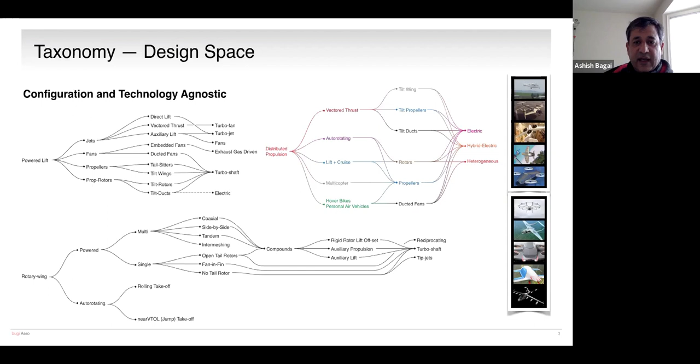However, these are no longer the technologies that constrain the design space, and distributed, aggregate, dissimilar, asymmetric configurations are now also possible with increasing likelihood of success, especially as those that are enabled at a practical level by electric drivetrains. Mind you, the GoFly competition is agnostic to configuration and technical approach, with the exception that it seeks to enable the remarkable, as stipulated in the objectives of the competition. But as you've seen, there have been a number of new approaches that have been developed in recent years.

What's important here is that the learnings from different domains can provide insight and solutions to technical challenges for other applications. Historically, the trends in VTOL technologies have been driven primarily by the desire to hover efficiently and fly fast. Doing them both together, of course, has been a big challenge. There have been some successes in hybrid or compound systems, the tilt rotor and the lift offset compound being two examples of aircraft capable of extended hover while flying fast.

Morphologically, helicopters look the way they do for a reason. But this is no longer the case in terms of power and propulsion integration. And today, numerous new concepts have been developed and proposed to enable vertical flight and personal air vehicles, all being enabled by the ubiquitous availability of materials, new systems, new design methods, affordable components and skills, and all of these woven together by the fabric of modern communications and information sharing. This is a particularly exciting time in the development of vertical flight.

Indeed, recent trends in man-rated VTOL aircraft, typically involving some level of electric, hybrid, or mixed propulsion, have shown exponential increases in the number of aircraft projects during the past decade. In fact, by current count, well over 130 concepts are at some stage of development, and this discounts unmanned and other smaller UAS systems.

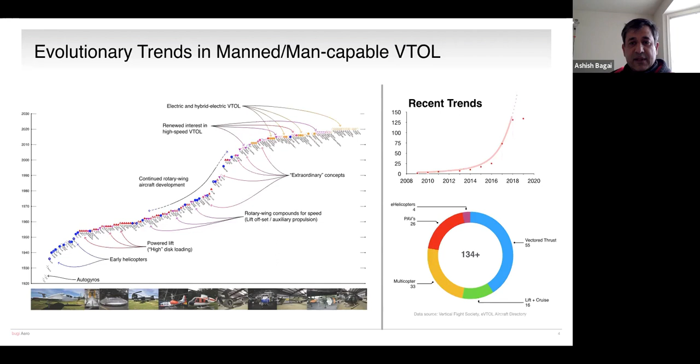So with this in mind, let's take a quick look at the effort and what needs to be accomplished. In February, the competition is looking for solid proof of viability, with phase 2 awards being announced in March. Thereafter, it's a mad dash to integration, testing, verification, and preparation for flight test, executing pre-competitive flight test, addressing requirements, gathering data in support of flight readiness, and then finally followed by a competitive fly-off in October.

Accomplishing all of this within 3/4 of a year is going to require some carefully orchestrated efforts to address everything from personnel and inventory management, fabrication, subsystem integration and testing, air vehicle integration and testing, through dynamic simulation, modeling, ground testing, and finally flight. These are activities that are perhaps well underway, but it would help you to track your progress and identify your key milestones and the interplay between subsystems.

One of the most important opportunities for you is to ensure you communicate regularly and clearly between team members. Don't just schedule formal periodic meetings; maintain clear and open channels of communication, and push information to each other. Make sure the people who need to know of changes are informed directly and not through indirect means.

So I was pointing out that we need to recognize that while time is of essence, you will save more time and effort by pausing to measure twice before cutting in executing your program. Some rework and respins are inevitable, but if you can devise clever trial or proof of concept approaches to improve your execution of difficult technical areas, it is highly recommended that you do so.

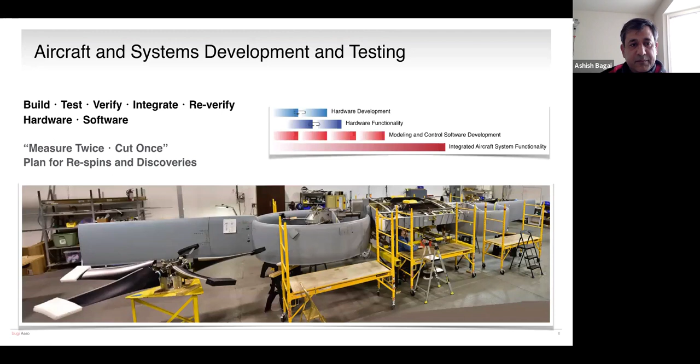In preparing for flight tests, there are a few things in life that will keep you up at night, like anticipating the arrival of a baby or preparing to launch your aircraft and replaying everything you've ever done and second-guessing yourself before first flight. My suggestion here is to prepare carefully and deliberately. When our first baby was due, we attended classes on what to expect. We went to every class except the one on delivery by cesarean section because it wasn't relevant to us. Well, guess what happened?

You will have a lot of items to keep track of and to keep straight. Even for seasoned developers, first flight and flight test in general is an intense process. Plan your activities carefully, know your players, understand their requirements and how you will address them, plan for contingencies, big and small. Flight readiness and safety of flight board reviews often look for quantitative data to assess preparations for flight. Start capturing data early on, including during your bench testing. And subsystem verification testing can also provide a lot of significant and important information.

Often, information gathered during early testing periods can help substantiate and corroborate data required for flight. And you can adopt systems and methods to minimize overhead burden so that you're not having to document everything formally, but can do it in a streamlined manner.

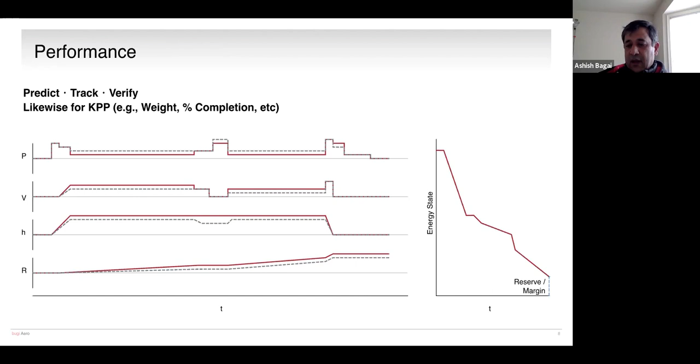In the same vein, it would behoove you to distill your subsystems into systematic groups to help identify key elements of the technical program that must be addressed. These include sharing information across subsystem groups, supporting the development of system interfaces, looking for potential failure points and their impact, all of which will support your ultimate success.

It is very important to retain some margin in critical systems, be it performance margin, redundancy, or alternative backups. Should the need ever arise to pull on one of them, you'll have a successful fly-off. Anticipating is important here. Try to position yourself into an operational scenario and look back to see what you may have wanted to adjust while you're executing.

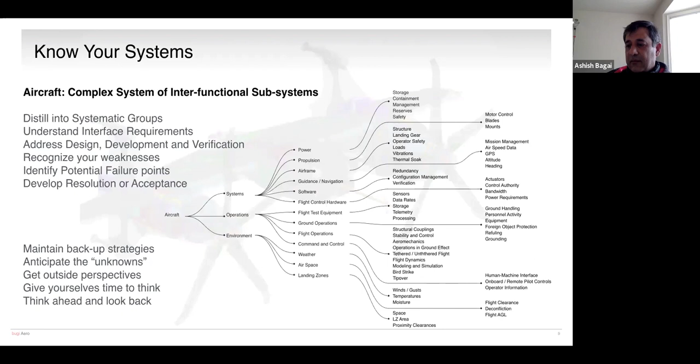System hazards. There are documented processes to capture system hazards and to identify them. I don't know to what extent or level of detail you'll have to assess the probabilities and consequences of potential failures, but you should attempt to identify them for yourselves to avoid derailments. You may not be able to mitigate all your risks, but if you have a plan, maintaining awareness will help you avoid them, or at least they won't catch you by surprise and you'll know what to do to minimize their severity. Indeed, you may have to reconcile to accepting some highly unlikely but high consequence risks. Maintain transparency on your reasoning and it'll serve you well.

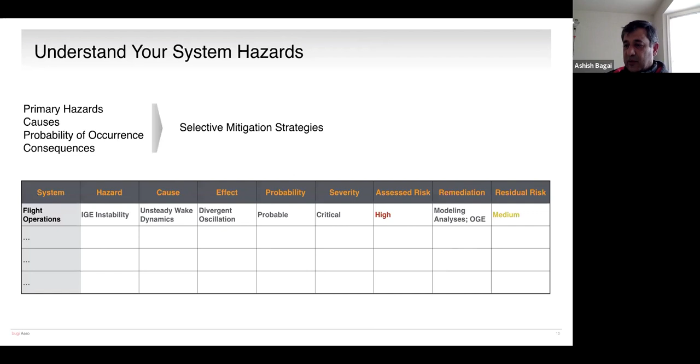This chart shows how, for each hazard associated with any subsystem, the consequences of the hazard and the likelihood of realizing it combine to assign a risk code to it. These are standard practices. And when developing a hazard matrix, don't just consider the highest risk hazards, rather be sure to capture your low risk hazards as well and justify why they are not of consequence. Being systematic will help avoid misses and unanticipated events and demonstrate holistic yet detailed awareness of your flight readiness to your flight readiness assessors.

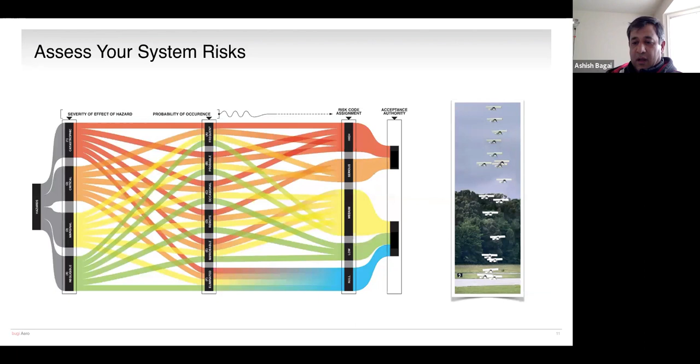And in parting, I offer that you accept my comments as guidelines for your consideration. These are based on my observations and experiences. They're offered to share experiential knowledge to facilitate your success. Your participation in GoFly will result in much more than a fun, incentivized fly-off. You will develop and hone new ideas, create new opportunities, and discover applications that have not been considered before. Most of all, enjoy the journey.

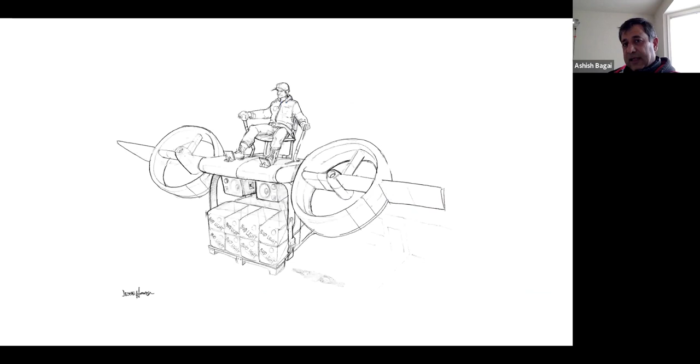Thank you. Thanks, Ashish. We have several questions coming in, if we can take some time to address them. Yes, I think we have plenty.

The first is regarding, at some point you had mentioned that you designed an electric rotorcraft controlled by variable CG. And so the question is, how is the CG varied? And I can offer some context from the participant if that would be helpful. Sure, if you can.

So they have said that many years ago, I designed an aircraft with pneumatic tubular booms included in the wings and tail, along which a mass could be driven at high speed to replace movable surfaces. Plus, of course, large airliners shift fuel around to optimize the pitch trim in the cruise. Along with human weight shift, I cannot think of any other means besides these three. So he's intrigued to hear how you varied the CG.

Indeed. So here the novelty of the design is less in the novelty of what you're moving. We, in essence, are also moving fuel, if you will, for our energy system. The motivation here was to design and build a scaled X2 type aircraft, all electric. And when I say scaled, it means lab scale at a university level. So it's about 20 pounds or so. And the idea here is to capitalize on the battery mass that's carried on the aircraft and use that for variable CG, and use that to control longitudinal and lateral controllability of the aircraft.

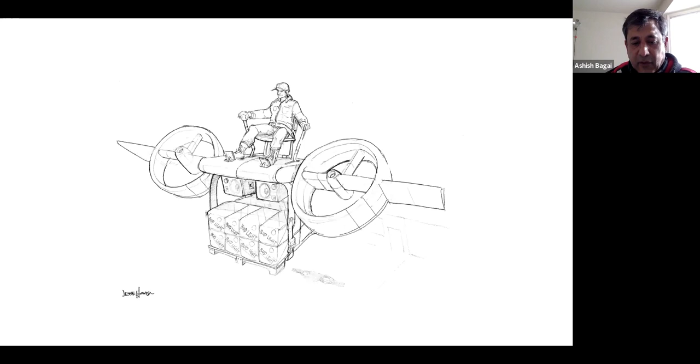The idea was to remove all the swash plate and rotor control systems from the rotating frame that is typically installed in rotorcraft or helicopters, including the X2 type lift offset devices, to use variable RPM because it's an all electric aircraft for thrust control or the equivalent of collective, but then to use the positioning of the battery mass, which in other applications would have just been dead mass on board, on a rack and pinion system, and move it both longitudinally and laterally.

So it's not different from moving a mass on board. It's more a question of economizing on adding additional masses. And in this case, since it's an electric system, the fuel package is the battery. So we're looking at moving the battery within the fuselage to provide lateral and longitudinal control.

Okay, great. And more broadly, I think you've addressed this a little bit, but if you can speak to some of the hardest things about making revolutionary new technology. Well, one of the hardest things is psychological, perhaps. It's the ability to crawl out of your thought paradigm and to step outside your comfort zone. It's sometimes challenging to set aside what you believe you've been taught and what you know to address elements that are not necessarily obvious. That's one of my reasons for constantly bringing up during my presentation the importance of bringing outside peers or cross-functional group oversight into the picture.

It's also not a bad idea sometimes to bring people in who have absolutely no background in this domain. It's not that they will come up with violations to physics. The engineers on the program are the ones who have to take care of that. But there are often constraints that we impose on ourselves. So getting that right is important.

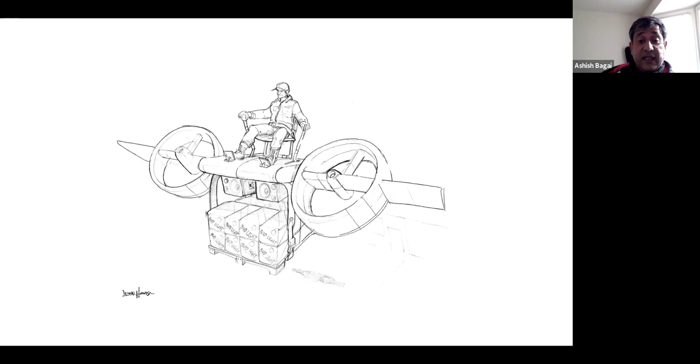In real tilt duct fashion, I can think of 3 big sized airplanes, capable of carrying people. And I see no reason why they won't work. I do think that they have certain challenges. You can see a rendition on the screen of tilt duct being put to good use. That's of the Ares program that I ran when I was at DARPA.

And the office artist drew that for me. But yeah, I mean, the general answer is yes. I'm not sure. Again, I don't understand the context, like yourself. I'm not sure what the concern is. Yeah. So Alex, if you'd like to offer us some more context on that, perhaps Ashish can address that a little bit more effectively for you.

The next question is, are there any particularly tricky parts about propulsion that our team should be keeping in mind and considering while developing their devices? Yeah, that's a great question. Perhaps I should have touched on that in greater detail. I'm not sure whether this means what type of propulsion, or whether it means the collection of a number of smaller propellers or thrusters in aggregate working together.

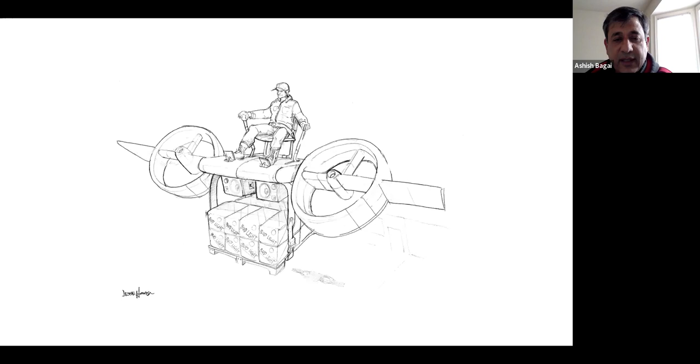In the same context that we have very little in terms of formal guidelines on positioning and arrangement of these propellers, you'll see that some considerations that are really important depend on interactional effects. And these are not necessarily that well understood right now. Interactional effects are important. The induced rotor flow field is important, whether rotors interact with each other or they interact with wings.

NASA developed a couple of different techniques of trying to create useful interactions. Those are really worth considering, right? You probably want to make something work to your benefit in terms of improving your performance rather than taking a drag impact or a vertical load impact just because you happen to put something over a wing.

But you have to actually ask a more fundamental question about electric distributed propulsion systems, and I think many of the concepts we're seeing evolving these days are based on those, even though not all of GoFly's competitors may be working on those. You have to think about what increasing the number of rotors really does for you. Helicopters, like I said, look the way they do for a reason.

So if you're trying to replace something with a different technology, one must fundamentally ask, what are we trying to do? It enables new configurations, yes, but so what? And how does that matter? I think the answer is pretty obvious, right? I don't think we have activity of people going out and trying to make helicopters the way we have people trying to make distributed electric aircraft. So to articulate or justify that is kind of important.

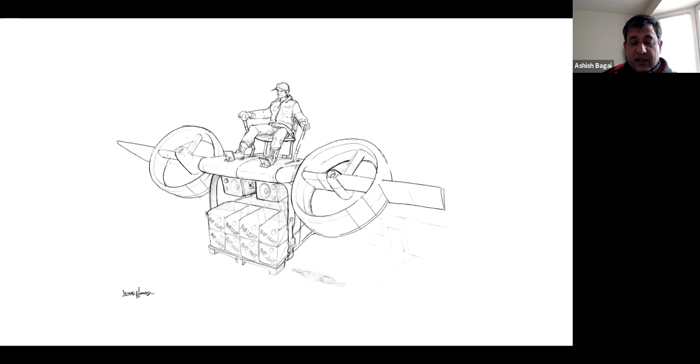I think if your participants really understand what they're doing in a broader sense, even though the excitement and the accolades that come with winning a prize may not necessarily be there, this is remarkable to do at this point in time. So again, underscoring the fact that you have to enjoy the journey, and enjoy doesn't just mean have fun doing it. Of course you're having fun doing it. Nobody does aerospace unless it's fun, unless they're really passionate about it.

But I think there's a lot more to it than just pursuing a prize. And if people can understand that, which I think most people do, it'll be remarkable. I just sometimes feel that it's easy for people to say that the winner takes all. I'm not sure that the winner takes all in this case. I think there's a lot of very powerful takeaway that'll occur because of this.

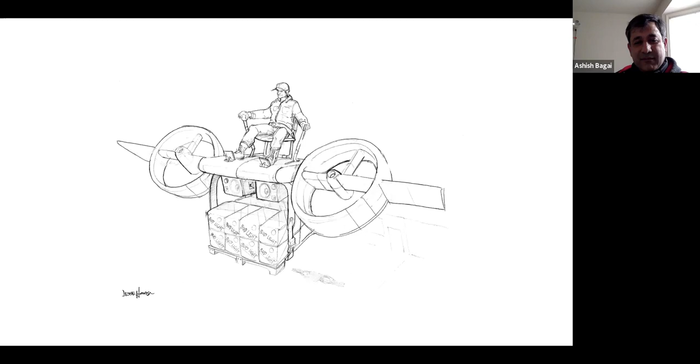Great. Thank you so much for your time. I'll give a moment to Gwen to wrap us up. Sure. Ashish, thank you very much for your advice and your expertise. I think it will be greatly applicable to our GoFly teams. And I echo your sentiments that the GoFly competition is bigger than GoFly, and we hope to truly catalyze the creation of personal flying devices, change the face of mobility, and support our teams as they create a new future. So thank you for your time today in helping our teams.